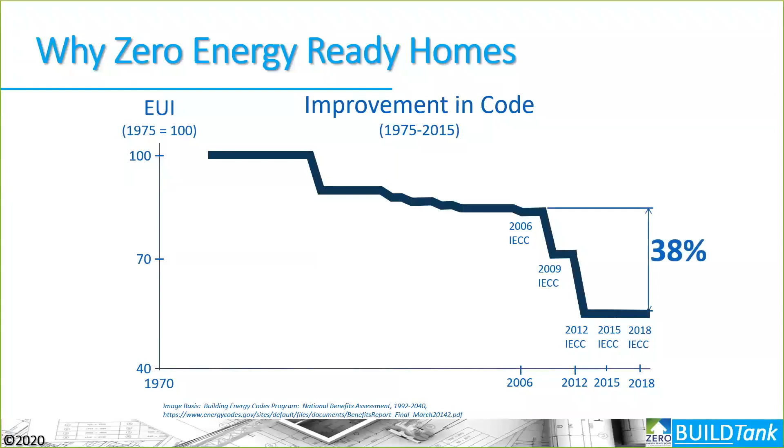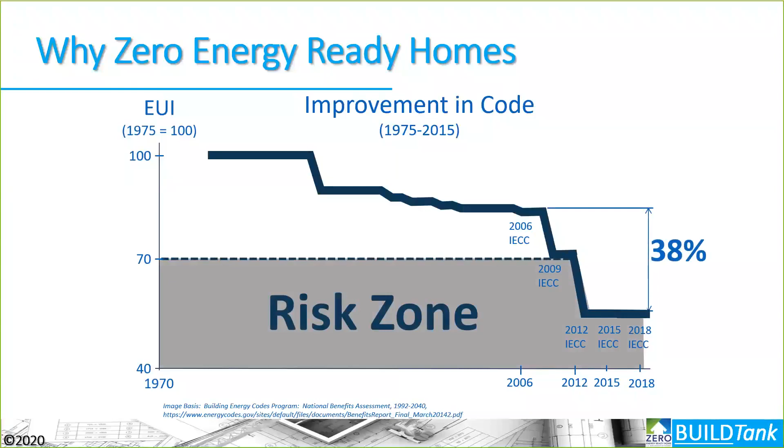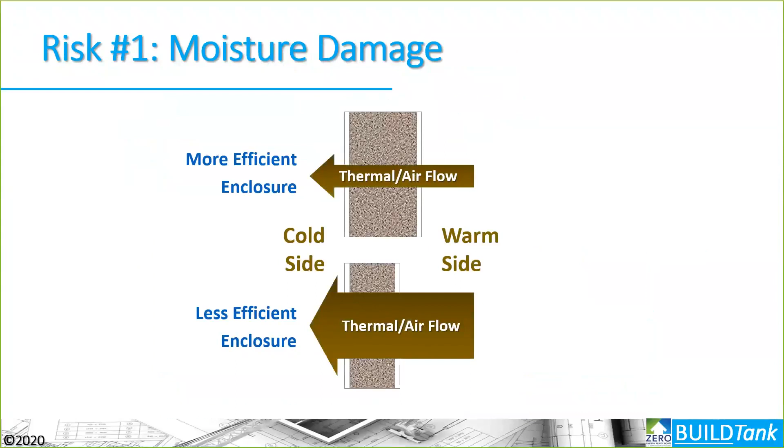What we do know is that this roughly 38% increase in efficiency gotten by codes has created potentially a risk zone that the Zero Energy Ready Home program is really trying to address. And what I mean by that risk zone is, if we look at one of these risks, potential moisture damage, we see that energy flow through a more efficient thermal envelope is less. And because it's less, we get this colder surface on the exterior of our buildings, and that colder surface is prone to more wetting or condensation and less drying potential.

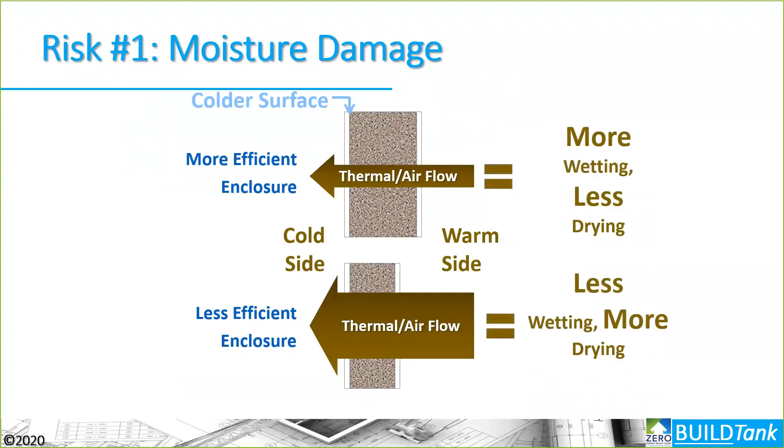And so there is this need to continually consider the applied building science and systems thinking that we talked about last time with regards to how we're building our homes now in order to mitigate this risk. And the DOE Zero Energy Ready Home Program is a means of applying that building science to mitigate this potential risk. Another risk that we have, although not as much in our drier climate, is a comfort issue risk.

This lessening of thermal flow through our building envelopes creates longer swing seasons, and especially in more humid climates, the humidity control that's needed in our houses becomes a bigger issue. So ensuring that we have properly designed and sized HVAC systems to deal with not only heating and cooling our house, but humidity control, is an issue. And ensuring that we have HVAC systems, whether they're hydronic or electric or forced air, that take into account this change in our thermal envelope is crucial.

And we're seeing that the majority of new houses really are designing that HVAC system before the house is built, and there's this disconnect between ensuring that what is specified for that thermal envelope is actually being executed, and that the design and performance of the HVAC system is actually meeting that thermal envelope.

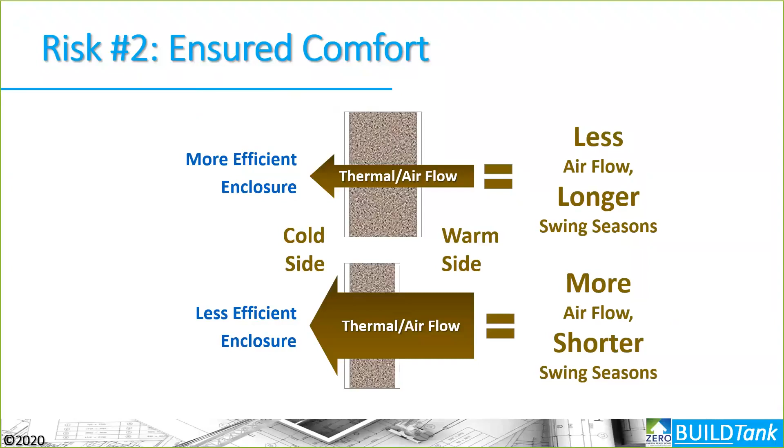So this is one of those potential risks. And then the third kind of risk that the Zero Energy Ready Home Program deals with is the tightening of our thermal envelope. As we tighten our thermal envelope and create better and more efficient homes, we also are potentially accumulating more contaminants inside that home unless we are dealing with ventilation in a meaningful way. And the Indoor airPLUS program that's tied to the Zero Energy Ready Home Program is really dealing with this potential risk there.

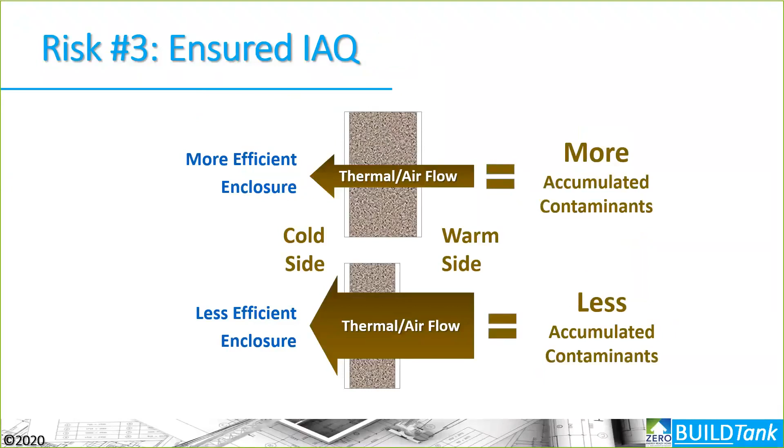So as we're building more energy efficient homes through just the IECC process, we need to think about these building science and systems thinking approaches in order to mitigate the potential risks that we're having. And again, the DOE Zero Energy Ready Home Program helps us think about that in those terms here.

So what does Zero Energy Ready Home mean? So in order to deal with these risks, we're trying to optimize efficiency and get more energy efficient enclosures, energy efficient components in there, and integrate systems thinking and applied building science into the equation when we're thinking about designing and building the houses that we want to live in and we want to bring to market here.

The next step is to ultimately do no harm there. So we have to have comprehensive water protection systems and water management systems to ensure that we're not getting repeated wetting of our assemblies, that we're marrying wetting potential and drying potential, and really ensuring that we have more drying potential than wetting potential there.

Ensure that we have comfortable systems in our houses, all types of HVAC, again, depending on if you choose hydronic or forced air or whatever type of system, making sure that the system is wedded to the enclosure that we're building and that they're working together there. And then ultimately, proper indoor air quality concerns to have not only a look at the materials that we're bringing into our homes and building with, but that we have proper ventilation in our houses as well.

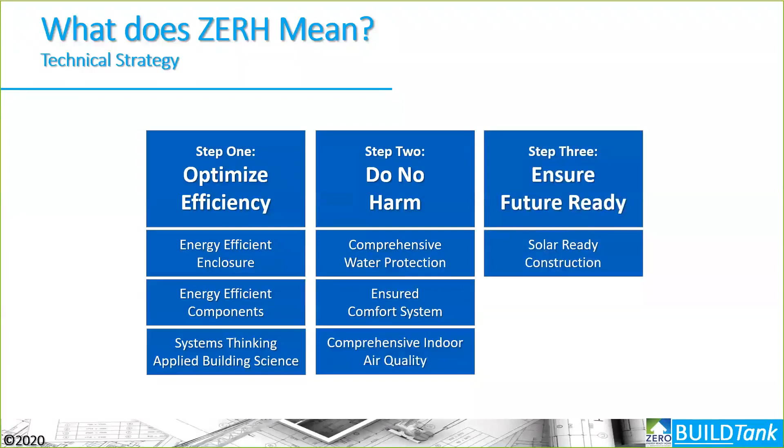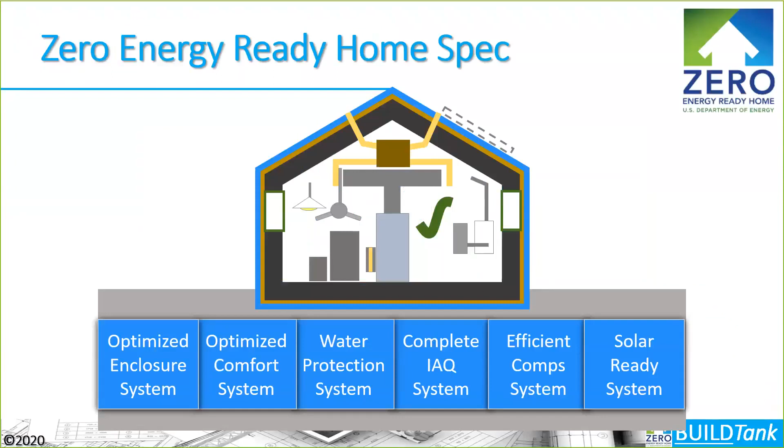So looking at this again, these different components or specs for the DOE Zero Energy Ready Home program is optimizing that enclosure, optimizing the comfort system, ensuring that we have proper water management systems in our homes, not only for bulk water, but for water in its vapor state as well, complete indoor air quality systems, efficient components, and then we're ultimately ready for that solar at the end here to take it that next step.

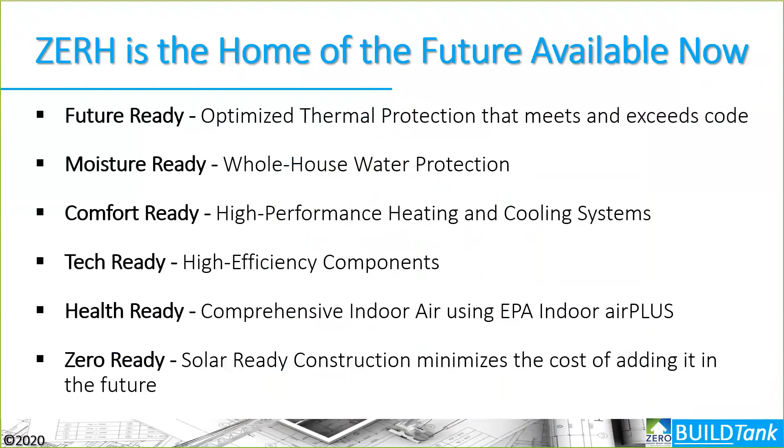So another way to think about it is being future ready, and that's really what we're talking about here. The Zero Energy Ready Home program has been named that specifically because it's not a zero energy program. It's getting you to that point. It's future proofing that house. So we're moisture ready, we're comfort ready, we have technology and health. We're ready to put on that PV panel that will take us that next step.

So hence the definition of the Zero Energy Ready Home program, which says that it's a high-performance home which is so energy efficient that a renewable energy system can offset all or most of its annual energy consumption. What it is not saying is that you have to offset that annual consumption at the time of construction. So in essence, again, we're future-proofing that house there.

So this definition means that we have a pathway. We've achieved a pathway to get to zero energy. We've maximized our thermal envelope. We've maximized the systems in our houses. And generally speaking, if you've done a good job of that, you can only get to about a HERS 40 in that HERS rating system, which we'll talk about a little bit more. The rest of that to get to true zero is happening by adding PV, or solar photovoltaic, to your house there.

So at a minimum, every home is future-proofed. And what we mean ultimately by future-proof is this example here. So we see that PV generation is increasing and improving over time here. So if I had a panel that could produce 200 watts now, in the future it could produce 500 watts there.

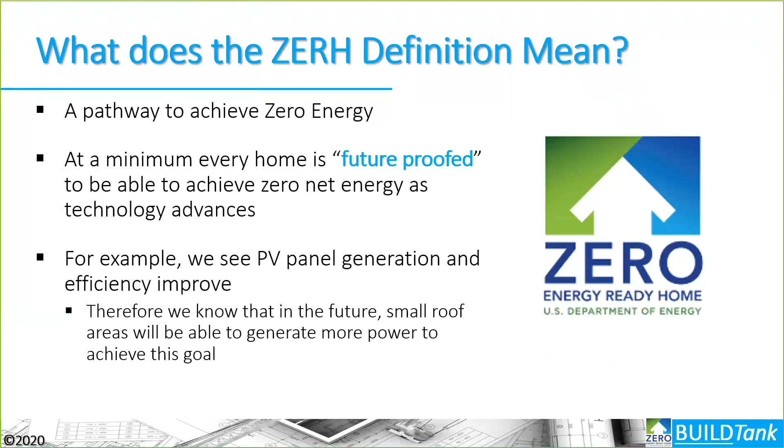So it's going to be easier to get to that zero energy if I've maximized my thermal envelope and I've taken into account the opportunity cost to do those things that are behind the drywall correctly and future-proof that house, so that when it makes sense to add solar in the future, I'm able to take that house to zero energy. Now, that doesn't mean that we can't do that from the start, that we can't design the house and make it make sense to add solar at the beginning. But what it does mean is that the program doesn't require that you put that solar on and get all the way to zero energy from the get-go here.

So what we've really been talking about is how do we define that thermal envelope and how do we maximize that thermal envelope's performance within reason to be able to make it make sense ultimately to put that PV on the house. And we have to remember that it's not just the thermal envelope that we're thinking about, but these other systems that we're putting into our house, specifically HVAC or air conditioning of the air in our houses to heat and cool our houses. What type of systems are we putting in there? What type of appliances are we putting in there?

Because these are things that last for significant amounts of time, especially the thermal envelope. You know, we think that that house should last 50 to 100 years. We're not going to want to go back in and upgrade that component of the house. If we're talking about HVAC systems, we're not going to want to go in and update the hydronic piping or the ductwork in that house. We want those things to be rock solid at the time of construction. We have that one-time opportunity cost to do those things right.

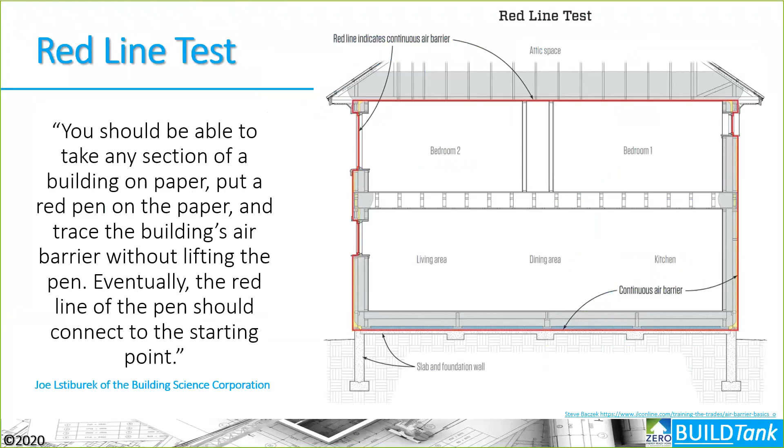But the boiler or the furnace or the PV system, those technologies will continue to advance, and we can change out those things and future-proof our houses to be able to change those things out easily and get to zero energy easily sometime in the future if we're not going to take it there from the get-go. So this difference between zero and zero energy ready is really this notion of maximizing our systems, taking advantage of that first-time opportunity cost to do the things behind the drywall correctly and in the best way possible and the most efficient way possible to set us up ready to get to zero energy in the future.

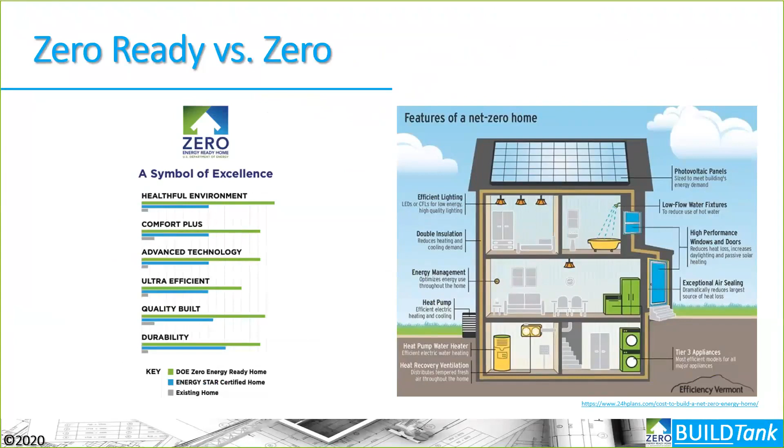And you see the zero energy house on the right. The biggest difference there is the addition of the PV. And just to stress it one last time, that PV can be added from the get-go, from the start of the project, but it's up to you. You can decide to go that direction or not. It's not a requirement of the program, and therefore it's not a requirement of what's happening up in Summit County there.

So what's the business case for doing that? Why are people thinking about zero energy? Well, there are climate goals for 2030 and beyond, but we also see that we get a significant amount of energy bill or energy savings from just a dollar perspective there. And we get a significant amount of carbon emissions reduction by going this direction. So that's definitely part of the equation of why people want to go this direction to build more efficient homes.

We also see that there's a consumer case as well, just a much better living experience inside our houses. We have better health and comfort. We have protection from the elements and from the cost of ownership. We have better quality and enhanced value in these houses. It has been shown over time that homes built to programs like Energy Star and the DOE Zero Energy Ready Home Program keep their value much more and have that long-term value and resale perspective, as well as from the first sale perspective, that there's advantages there.

There's lower cost of ownership, so your monthly cash flow is higher. You're spending less on your utility bills, therefore you have more money to either save or spend on other things there. There's lower maintenance costs, and there's usually lower health expenses as well. People live more healthfully, if that's a word, inside of these homes than in other homes that haven't taken this into consideration there.

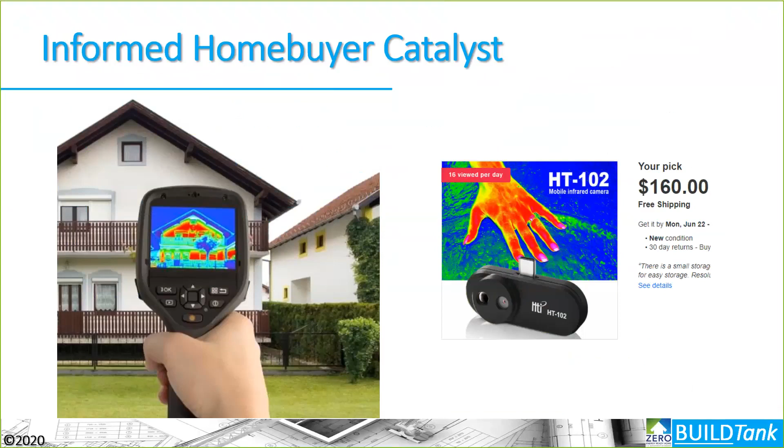Informed buyers also have a bunch of tools available to them that weren't really available to them in the past, this being one of them. These IR cameras are incredibly cheap, so cheap that they might end up in the hands of a home buyer. If not a home buyer, then somebody that might be consulting with the home buyer, somebody who wants to build their house. They can assess things like quality, insulation, and the thermal bridging components of houses.

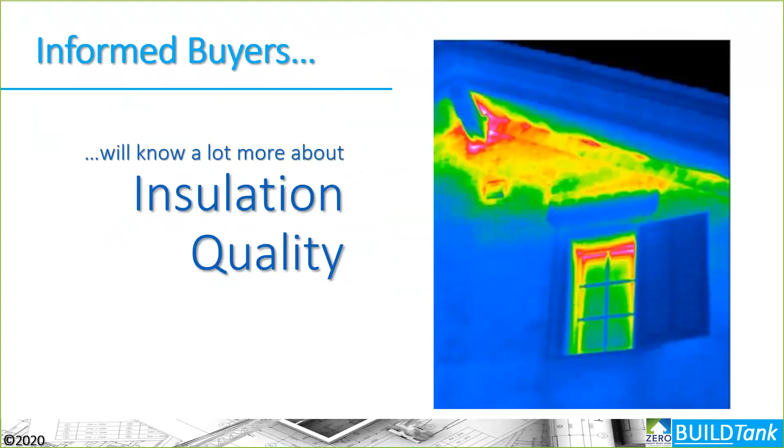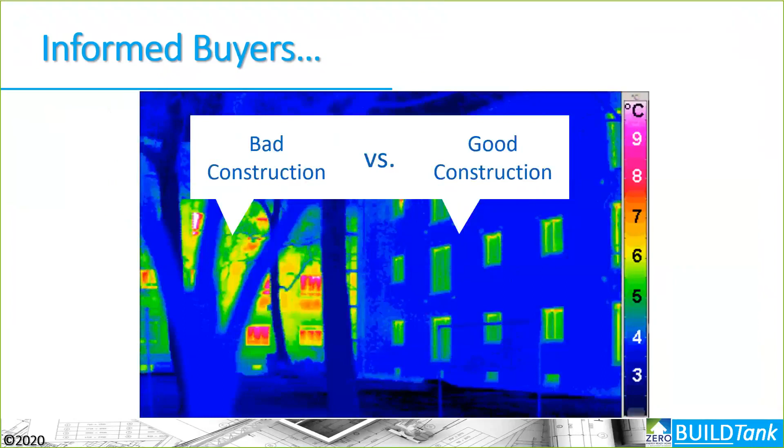So they might come to you and ask, how are you dealing with this picture that I took? They can look at and assess the quality of windows. They might not know what they're looking at here, but this is a moisture issue that's associated with a thermal image. But they can have a pretty good idea of good construction and bad construction very easily. And even though they might not buy these cameras, these images are all over the internet, and an informed buyer is going to see that and maybe come to you with questions and concerns about that.

Informed buyers are increasingly aware of the living experience inside of houses and questioning how I can meet my core expectations. And if my core expectations are comfort and durability and health and all these other aspects, how can I build a house that will ultimately live better? And so the Zero Energy Ready Home Program gives us a platform for being able to create these houses that are proven to live better. But we need to think about how we're going to ultimately design and build that house.

And so what we recommend and the program recommends is beginning with an integrated design process. Some folks call this a building charrette, but really it's just a planning process. So in this integrated design process, we need to recognize that we might be doing something different than we've done in the past, and that's a change, and that change can be hard, but change can also lead us in good directions and help us understand why we're ultimately changing the way that we're constructing our houses. To create better efficiency, to create better long-term durability, to lessen risk for us as builders, but also risk for our occupants that will be living in these houses.

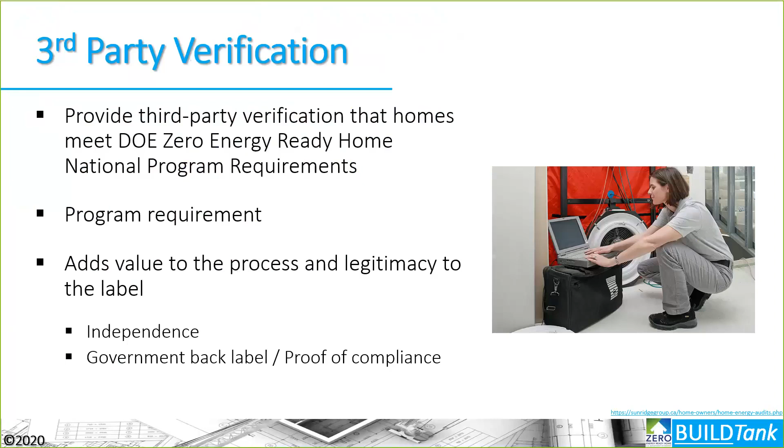So we're no longer saying, you know, I as a builder or as an architect, we do X, Y, Z. We're now able to actually prove that we're doing X, Y, Z, that we're building the most efficient, beautiful house that's going to be the most comfortable possible. I have some ability to say, I can prove that we're doing what we're saying we're doing because I have this label behind me as well. So it's definitely something to think about.

This verification by approved agency is something that the IECC has had in the code for quite some time. So an approved party is often a HERS rater, and the jurisdictions generally approve HERS raters or others to be an approved party to do code compliance. The DOE program also approves raters and others to be partners with the program to do third-party verification of the program as well. So you can go onto their site and find an approved rater, and I'll show you that in a second here. But with these third-party services, we think of potentially consulting and participation in that integrated design process as one of the things that they can do, because they have a lot of knowledge to share.

They have great knowledge about the program requirements for the DOE program, great knowledge about applied building science, and good knowledge about assemblies and material selection. Ultimately, how does this verification process impact the construction schedule, and how can they limit that impact so you can get on with the true construction of the house? Including that third party in design charrettes, design integration processes, and planning meetings becomes a crucial thing to think about.

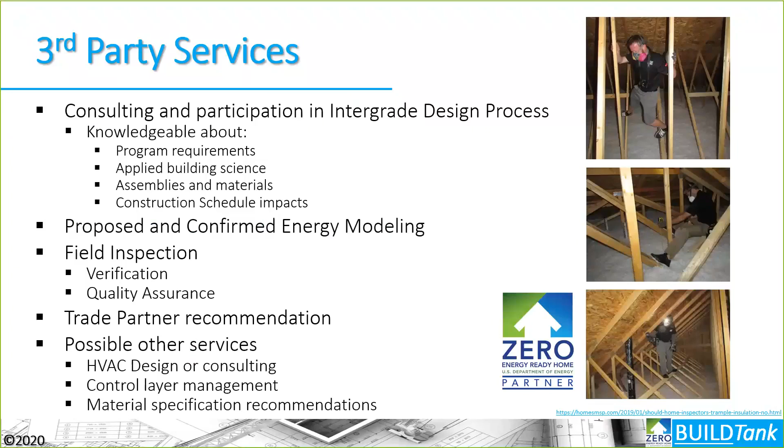So there are lots of reasons to think about third-party services beyond just the true verification of the DOE program requirements. The other thing about working with a third party that is ResNet certified, or a ResNet rater, is that ResNet does a significant amount of quality assurance on the rater.

Rating providers are the institution within ResNet, the Residential Energy Services Network, that actually certifies the rater. The rating provider has to employ what's called a quality assurance designee to perform quality assurance on certified raters. This is the minimum amount of quality assurance happening: 10% of the building software files, the energy modeling, is reviewed, and at least 1% of the rater's homes' field work is reviewed as well.

ResNet ultimately performs QA on the providers, which adds another level of quality assurance to the process.

The tracking of this quality assurance happens real time through what's called the ResNet registry. Every house that has a home energy rating done on it is registered in a national registry of homes, and you can go on that system to determine how the raters are doing - I'll show you that here in a second. This is the website, actually.

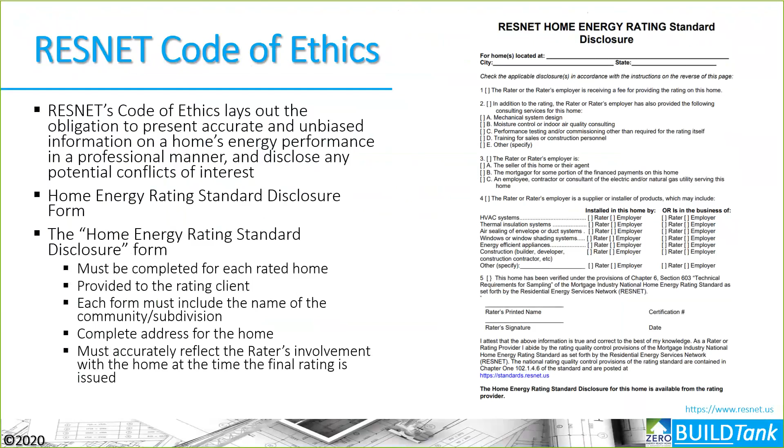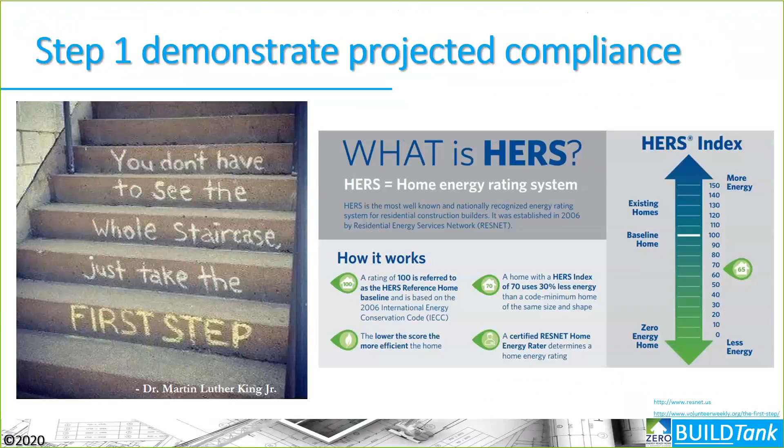Moving more to the specifics of the program, the first step is demonstrating projected compliance, and that first step begins with what we call a HERS rating. So what is a HERS index? ResNet, the Residential Energy Services Network, is the governing body of the home energy rating industry. They set the standards of practice and the standards for how things are modeled to develop that home energy rating index score. So there's the HERS, or Home Energy Rating System Index score, and there's an ERI, or Energy Rating Index. The HERS index isn't necessarily the same thing as an ERI.

A HERS index is an example of an energy rating index, but there are other energy rating indexes out there, most predominantly the Energy Rating Index for the 2015 and 2018 IECC. They aren't necessarily the same number, but it's basically using the same process for generating that index number.

Like a golf score, an energy rating index means that the lower the number, the more efficient that house is. So the lower, the better, zero being that zero energy home. You can think of it as a miles per gallon rating system for homes, as a way to document the efficiency of a house in a number system.

In the HERS scale for ResNet, the reference home is based off of 100 on the scale, which is equivalent to a home built to the 2006 IECC. If we remember back to the beginning of the presentation, everything is basically benchmarked off of the 2006 IECC. That's how I can tell you that the 2009 is about 15% better than the 2006, and the 2012 is about 30% better than the 2006 IECC. Everything is kind of benchmarked off that 2006 IECC.

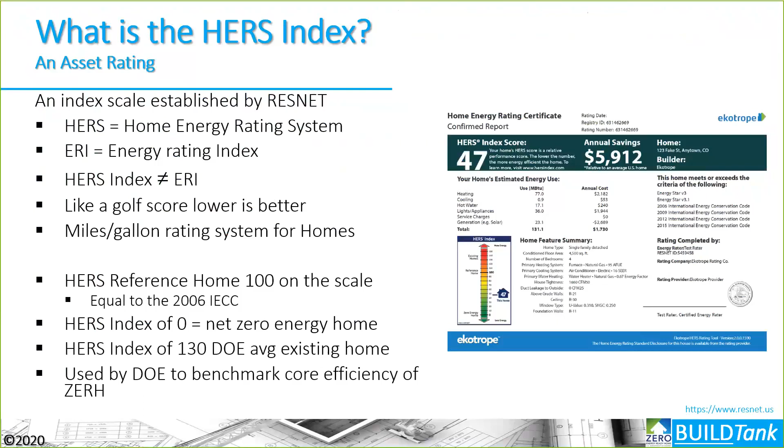A HERS index of 0 is that net zero energy home, a home that produces as much energy as it uses. The DOE has determined that on average, the average existing home out there is scoring about 130 on the scale. It's used by the DOE to benchmark the core efficiency of the DOE Zero Energy Ready Home program. It turns out Energy Star also uses this system to benchmark the efficiency for the Energy Star program.

So what we mean by putting an X through this certificate is that this certificate is an informational certificate. It's designed to be that miles per gallon rating for the occupant or buyer of that house. It gives lots of great information, but it is not a compliance certificate. It doesn't demonstrate that the house met the intent of code or the requirements of a program like the Zero Energy Ready Home program. So you're going to get the certificate, and it's great to put in front of buyers of homes, but you need to know what it is and what it isn't. It's a marketing mechanism certificate, not a compliance mechanism certificate.

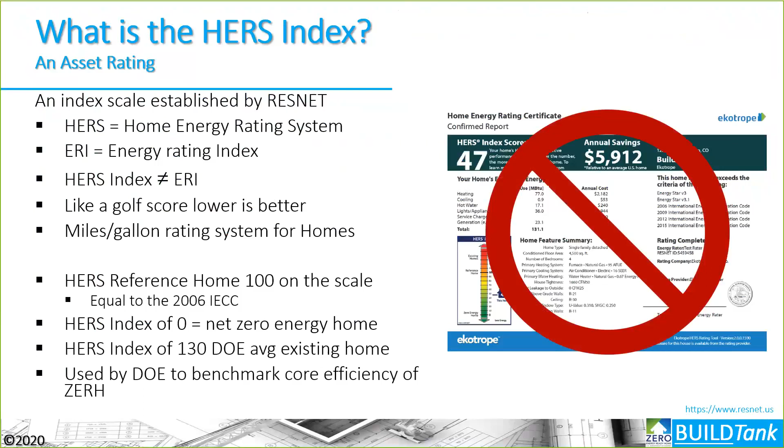When we're talking about showing compliance with the home for the DOE Zero Energy program, you can choose to go a prescriptive path or a performance path. The prescriptive path is like the prescriptive path in the code, and the performance path is like the performance path in the code. Prescriptively, it's basically a rigid set of requirements that you must do—you can't go below those things, but you can exceed them. In the performance path, you have greater flexibility because you're able to trade things off.

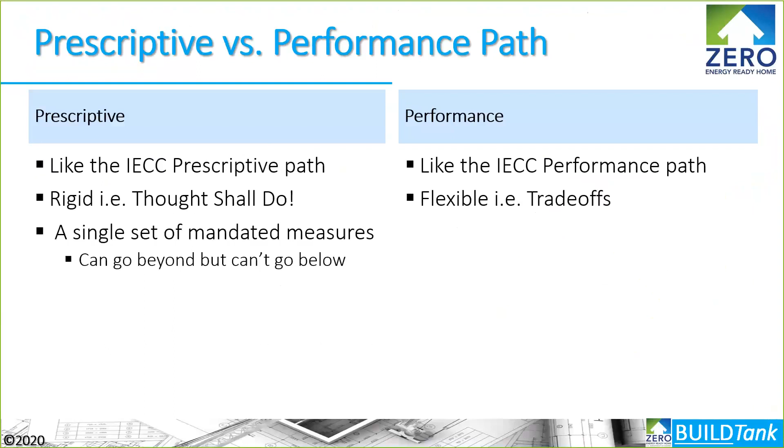You're able to have more choice in the specifications you're putting into that home. On the prescriptive side, it's a single set of mandated measures. Again, you can go beyond, but you can't go below. On the performance side, we basically start with what the builder wants to do, and we see what the builder's current specification is, whether it's going to achieve the goal of Zero Energy Ready homes or if it needs to be tweaked a little bit. So you'll see that the stretch to zero energy probably isn't quite as large as you think, and most folks lean towards the performance approach because it's much more flexible than the prescriptive approach for compliance.

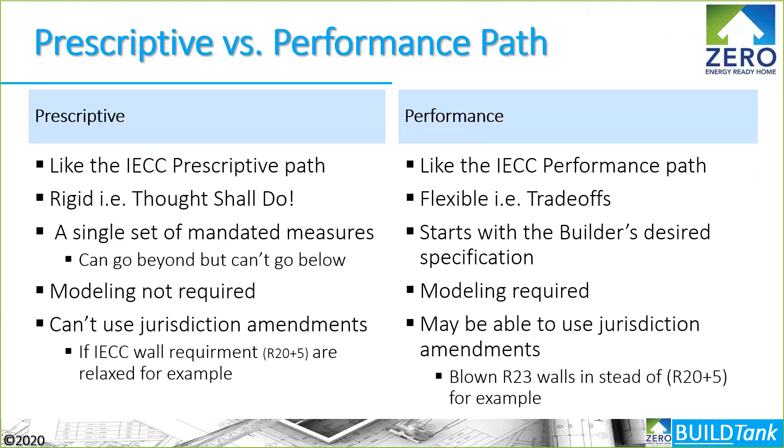Now, modeling is not necessarily required. It is not required if you use the prescriptive path. The performance path does require that model, and we'll show that here in a second. In the prescriptive path, if there are jurisdictional amendments used or created in that jurisdiction, you can't use those. Whereas in the performance path, you might be able to use those jurisdictional amendments, and we'll show you how that demonstrates itself here in a second.

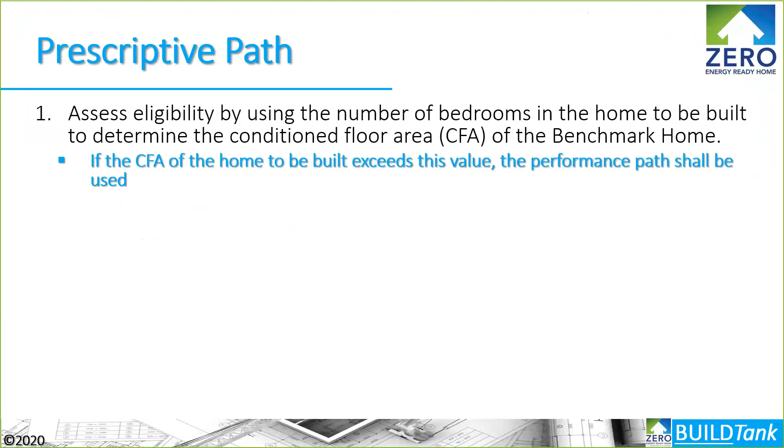So again, the prescriptive path ultimately assesses eligibility for that house by using the number of bedrooms in the home to be built to determine the conditioned floor area of that house and how it relates to what's called the benchmark home. So if the conditioned floor area of the home we're proposing to build exceeds this value, then you have to move to the performance path. I'll show you the benchmark home here in a second.

If the prescriptive path is eligible for use based on that prior step, then you have to use the mandatory requirements detailed out in the DOE Zero Energy Ready Home Target Home process. Again, these specifications are rigorous and you have to meet them. You can exceed them, but you can't go below them. You lose the flexibility of potentially trading off lesser attic insulation than required in the prescriptive path for more R value in your wall system or your windows or something like that.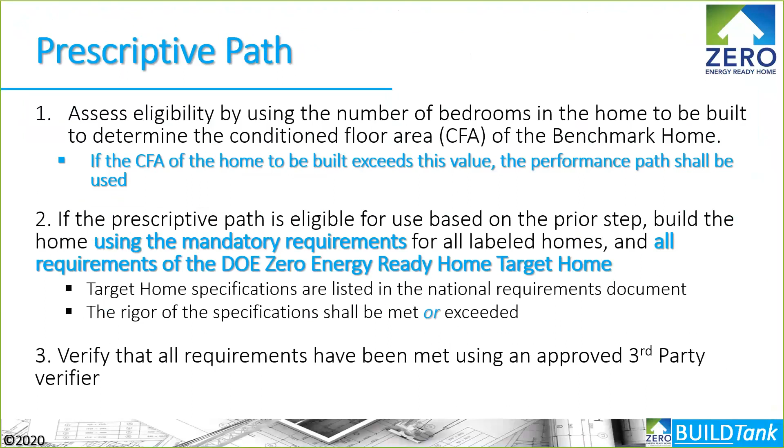Regardless, if you're using the prescriptive path, you still need third-party verification in the process. So another reason why most folks lean towards the performance path is that you still have to use a third-party verifier, and you gain more flexibility in the performance path.

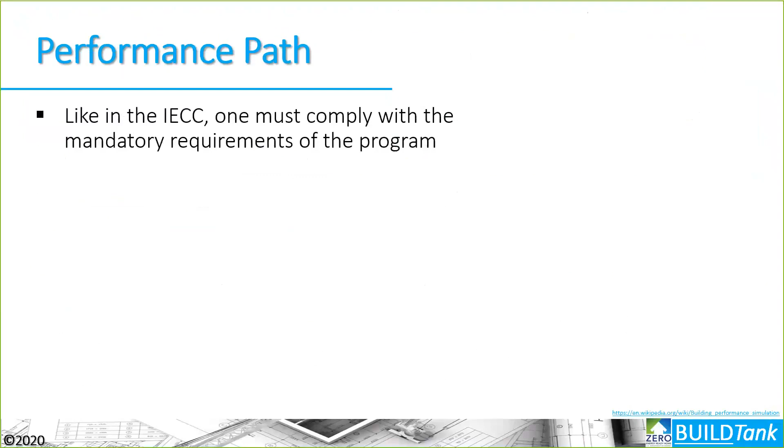So let's talk more about the performance path. Like the IECC, one must comply with all the mandatory requirements of the program, and then you can get that flexibility after you've done that. So the flexibility comes in when you're selecting a custom combination of specifications to meet or exceed those performance levels required by the DOE program.

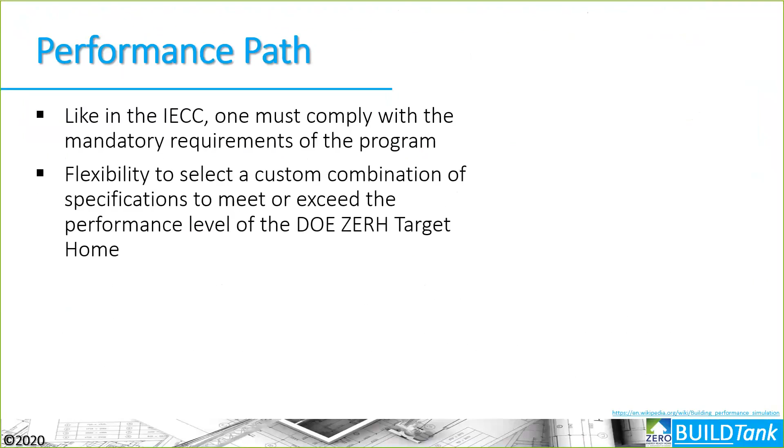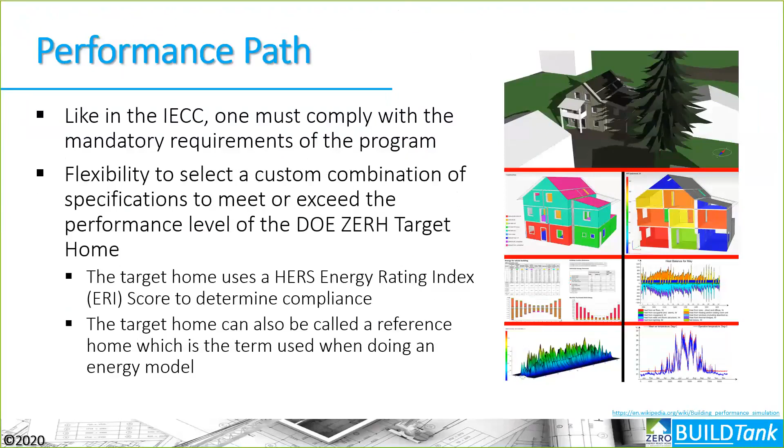So the target home uses a HERS index score to demonstrate this compliance, and the target home can also be called a reference home, which is the term used in the energy modeling world to determine what we're going to compare our proposed building structure to. We have to compare that structure to something in order to create an index compliance pathway. So ultimately, to understand the software, we want to understand how it works to create that HERS index score we'll use as our compliance mechanism in this first step.

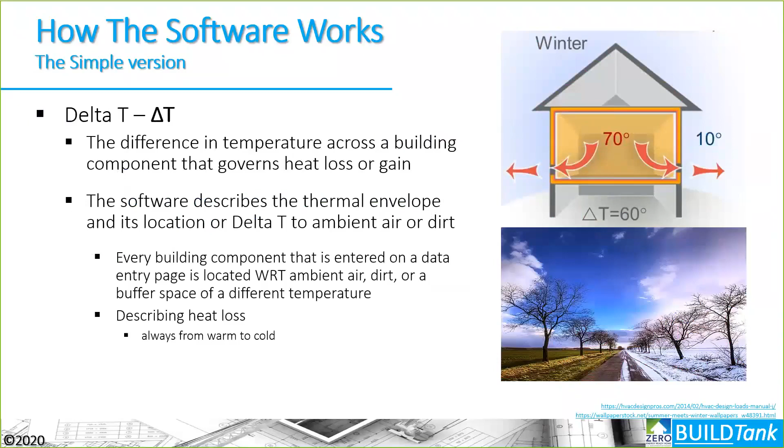Softwares basically work on this notion of delta T, or the temperature difference across a building component or assembly. This temperature difference governs heat gain and heat loss across the assembly, because energy is always moving from higher concentrations to lower concentrations. Within the software, we describe the thermal envelope in its entirety, from its foundation all the way up to its attic or roof plane adjacent to ambient air or ambient dirt. We're taking all these building components and putting them in relationship to a delta T location, to the ambient outside. So we're describing the thermal envelope, and that thermal envelope is our barrier or separation between conditioned space and unconditioned space. We're trying, ultimately in the energy model, to measure the amount of energy flowing through those assemblies from higher concentrations of energy to lower concentrations, which describes the heat loss in our buildings.

So when we're doing that, we create a reference home, and the software creates this reference home, which is the home that the rated house is compared to in order to quantify the performance and demonstrate compliance in our houses. A reference home is defined as a standard set of house specifications that generate a specific, consistent, and quantifiable energy performance in our homes.

So the DOE or the code or any other program that's using a reference home has defined the amount of energy use that they want to achieve in that house, and your house that you're proposing to build is compared to that in order to demonstrate if it's going to be able to do that or not, ultimately.

Which means that there are ultimately different types of reference homes out there. There's the IECC reference home. There's a HERS reference home that just benchmarks the efficiency of a house on that HERS index scale. But the DOE and Energy Star programs have their own reference homes, and I'll show you how that works here in a second. And then some utility programs that are offering utility builder incentives or other types of rebates might have their own user-defined reference home as well.

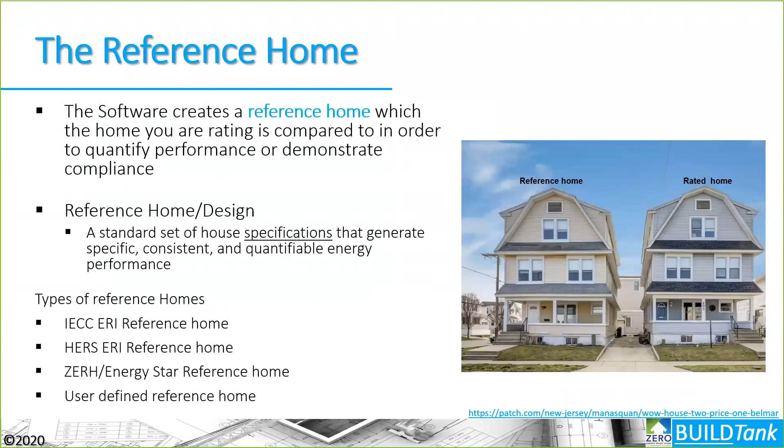So what's ultimately happening inside of the software is that we build a house inside of the software, and the software creates two homes that are geometric twins of each other. The reference home is overlaid with the IECC prescriptive envelope U values and R values, and any type of size adjustment that might happen because of a program like the DOE Zero Energy Ready Home program. The builder's house that you're going to compare to the reference home uses whatever the builder decides to use for its envelope R values and U values, and then also puts the size adjustment on there.

So ultimately, the builder's house is compared to the reference home to create a HERS target index score. And the house that is built must be equal to or less than the modeled HERS index score in this first step here. It's a lot of language that we've gone through to get to this point, but the ultimate point here is that we're creating a HERS target score that's ultimately demonstrating compliance in this first step. Everything else becomes the mandatory requirements of the home. This becomes the benchmark of the energy performance of that home. And again, your house has to be less than or equal to the HERS index that is developed through this modeling process, plus potentially any size adjustment that happens.

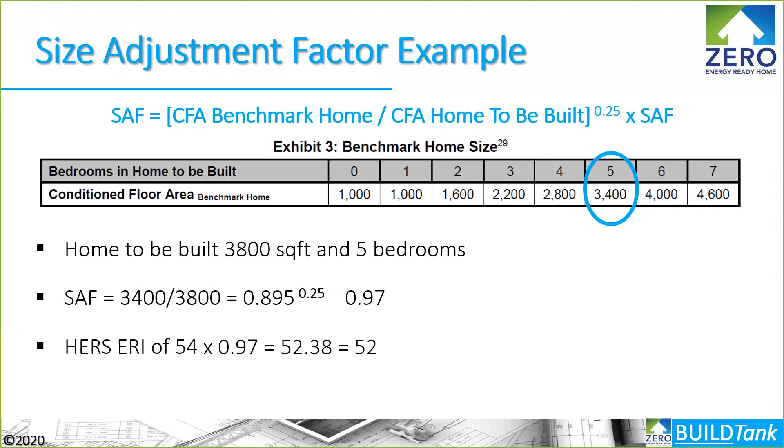And so again, this is one reason why you'll see that it's not a mandate of the program that you install solar on the house. The program is trying to ensure that we have a rock-solid thermal envelope to build on, to future-proof our house so that we can put solar on in the future to get to true zero. So the program documents basically say that on-site power generation may not be used to qualify a home for the DOE Zero Energy Ready Home program requirements. However, it can be used to achieve additional HERS index reductions needed for these larger homes to meet the benchmark home.

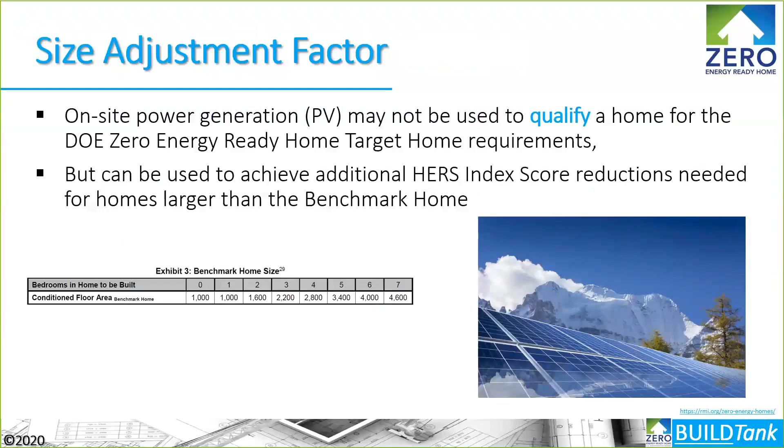It's not, in essence, making it less impactful to add that solar to it, but it's just trying to ensure that solar isn't impacting the need for a rock-solid building thermal envelope in our houses here. What we do see in this modeling process, which is a little bit contradictory right now, is that electric homes are currently, in essence, penalized in the HERS rating system. So this drives the Zero Energy Ready Home target score down if you're using electric equipment in those houses.

And why it's a bit contradictory is that often when we're talking about wanting to add PV to our structures in order to offset, PV obviously is generating electricity. So in order to offset the energy use in the house, we might want to ensure that we have electric appliances in our homes, for example, to use PV to offset that rather than gas appliances. Right now, it's something that the DOE is struggling with. RESNET and the energy modeling world are struggling with it as well, and hopefully we'll get some resolution to this dichotomy in the future.

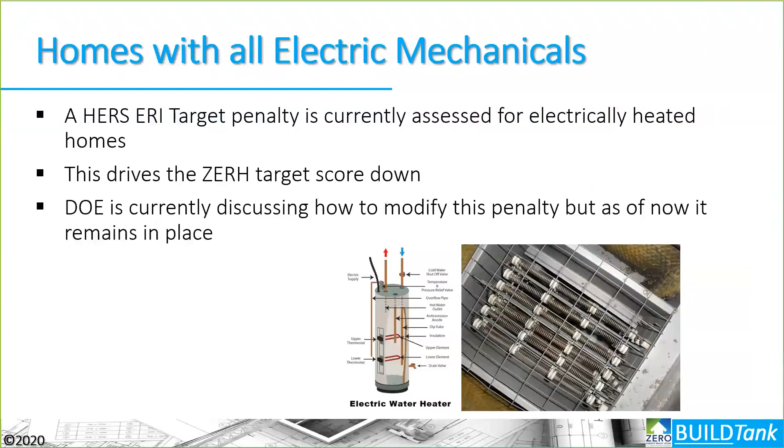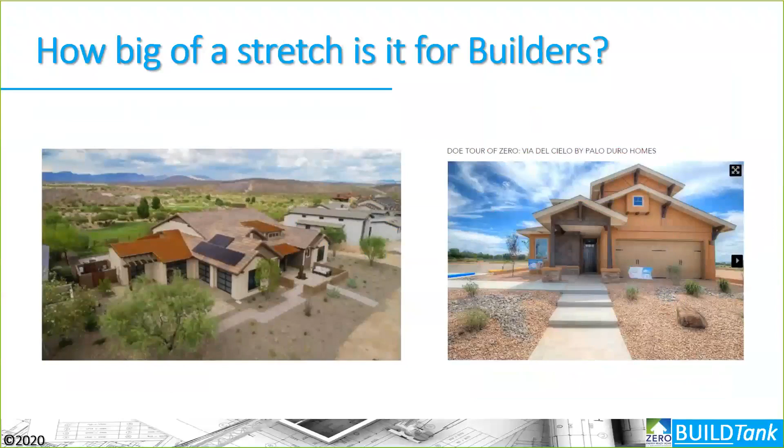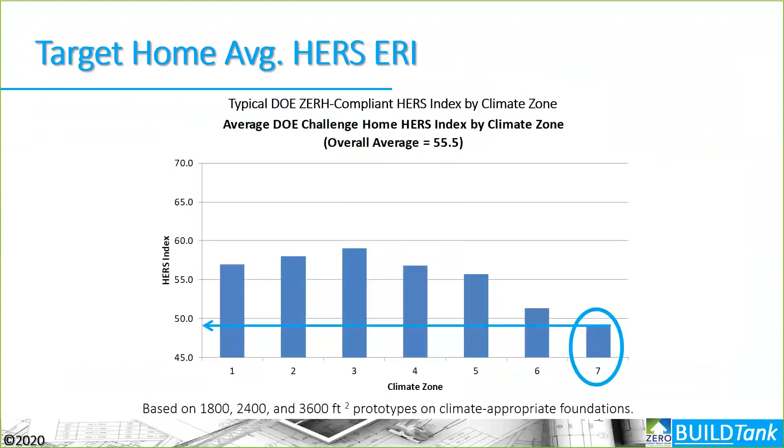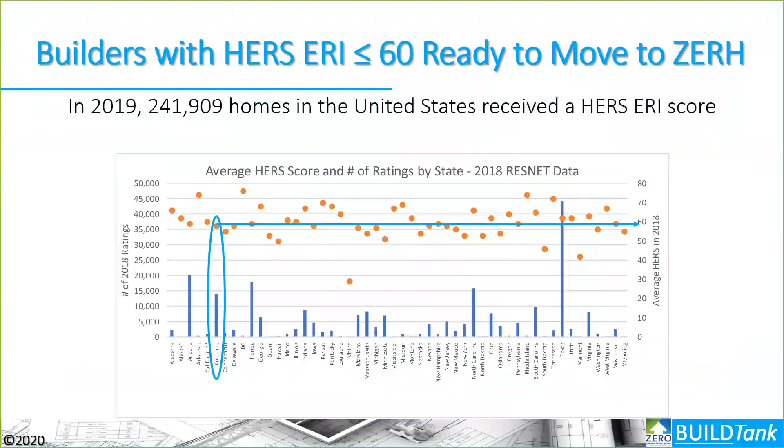So ultimately, the question might be how big of a stretch is this for builders in our climate zone? When we're looking at the average target home in climate zone 7, it turns out that the average compliant benchmark DOE zero energy HERS index score is about 49. Now, through some national data broken down into statewide data, we're seeing that the average HERS index score in Colorado is about 57. That takes into account a large number of homes that are built on the Front Range.

So my guess is that the homes up in Summit County are already below 57, and that the stretch to get to 49 probably isn't going to be as great as it is on the Front Range to get from 57 to 49. Interestingly enough, in Climate Zone 5 on the Front Range, the average benchmark score for the DOE Zero Energy Ready Home Program is about 55. So climate zones and increased elevation do make a difference.

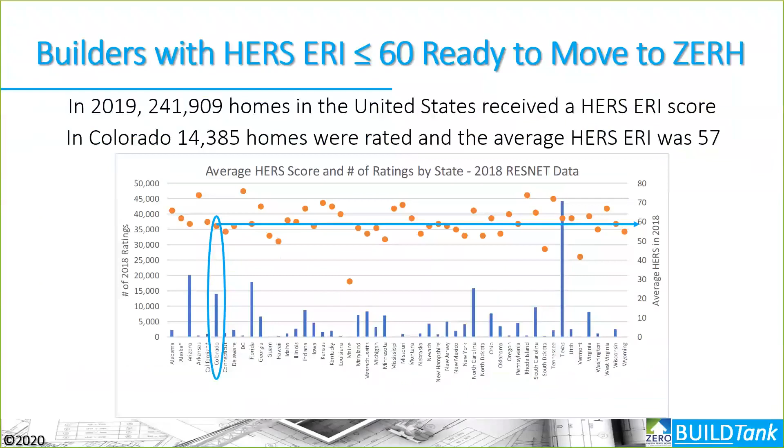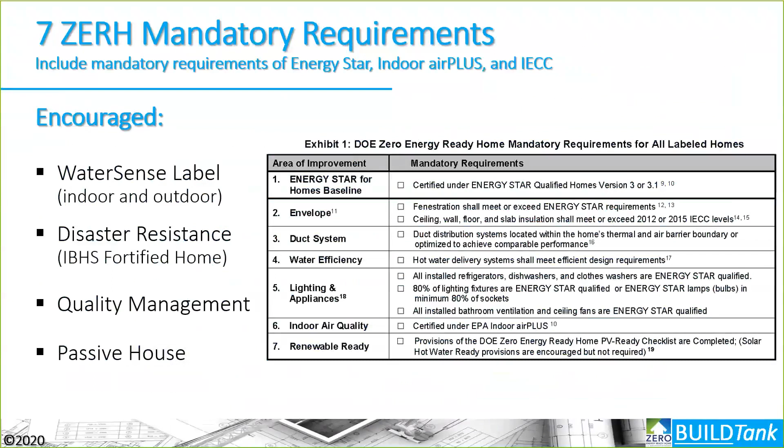Mandatory requirements. So there are 7 basic mandatory requirements of the program. And then there are some other things that are encouraged but not necessarily required. We'll go through each of these mandatory requirements individually. So the first is utilizing Energy Star as the foundation. Energy Star's foundation ensures that we get that rock solid envelope and a HERS index benchmark score that demonstrates that rock solid building thermal envelope.

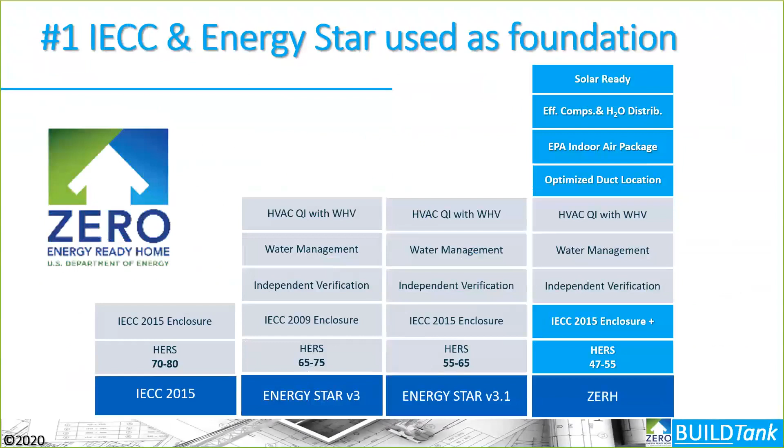The DOE adds some additional things to the envelope to ensure that we're going to be solar ready, that we have efficient water heating and distribution, that we have good indoor air quality, and that we've optimized our HVAC or heating and cooling systems in our houses as well. But again, it's basically using Energy Star as the foundation of our program to get that rock solid thermal envelope. And we'll be talking about those mandatory requirements next week.

So we have the 2015 IECC, which is kind of the foundation of the Energy Star program. We get tighter construction, we get better quality and performing windows, and we ultimately get compliance with the DOE program.

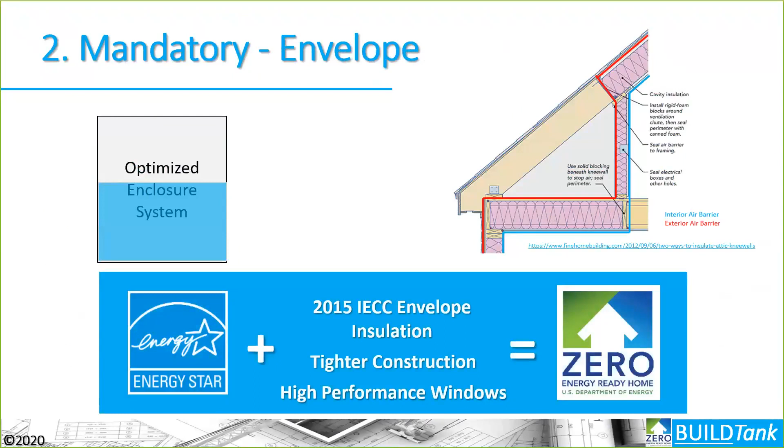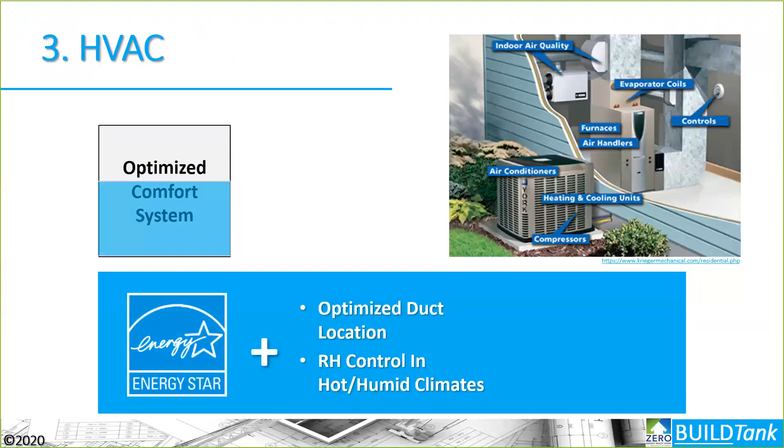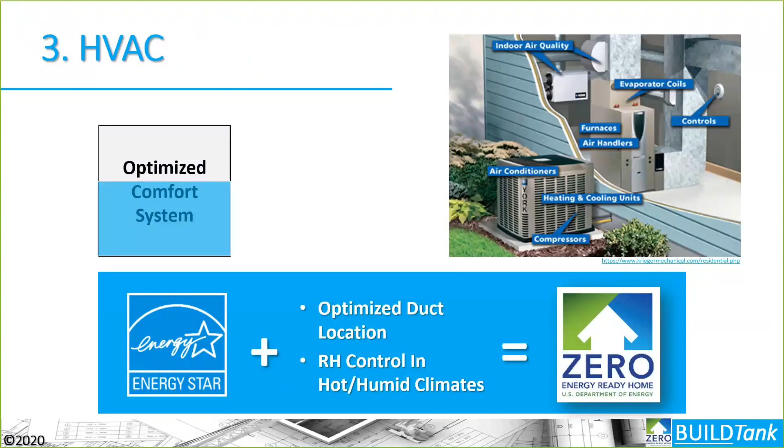HVAC: again, the program, being a national program, is skewed heavily towards forced air systems, and forced air systems obviously have duct systems. But from a hydronic perspective, which we see more often in Summit County, we want to make sure that we have good HVAC design and specifications, that we're using high efficiency equipment, and that we're ensuring the installation of that hydronic system is working well, and potentially thinking about air source heat pumps as well in those climates.

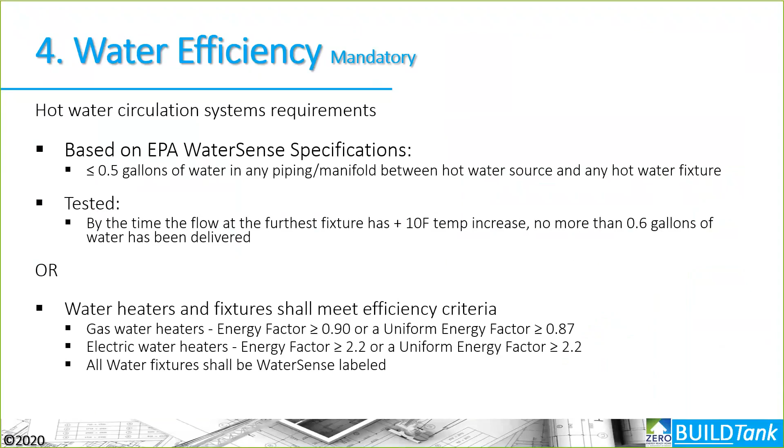Water efficiency is another big part of the program. This is the 4th mandatory requirement. It's talking about using some type of hot water circulation system and testing that it's actually performing. Or you can use more efficient hot water heaters and fixtures to meet the requirements. So if you're using a gas water heater, it has to be greater than or equal to 90% energy factor. Or if you're using an electric one, a 2.2 energy factor. You also have to have WaterSense labeled fixtures for your faucets and shower heads.

There, and your hot water distribution system can't store more than 1.2 gallons. So you do have to think about that distribution in either method that you're using to comply with the Zero Energy Ready Home program. And we'll talk about that more in the future here as well.

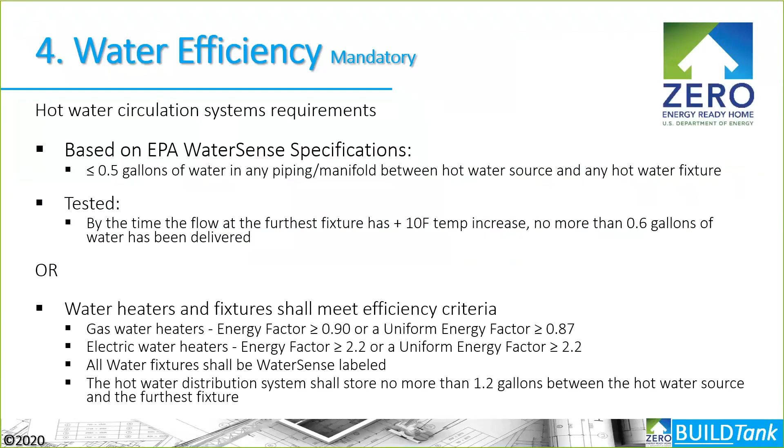Lights and appliances, again, ensuring that all the appliances, exhaust fans, lighting equipment, water heating equipment, all are Energy Star qualified, working in that system in order to get that DOE Zero Energy label there.

Indoor air quality relies heavily on the Indoor Air Plus program to ensure that our houses are not only radon resistant, but that we're using low emission materials, so the low VOC or off-gassing materials. We've dealt with combustion safety issues and filtration issues in our houses in order to get that DOE Zero Energy Ready Home label here.

And then ultimately that we're renewable ready. We're ready to put PV on the house if we haven't already done so. Therefore, we have to provide the PV ready checklist and meet the requirements of that in order to meet the DOE Zero Energy Ready Home program here. So there are these 7 core requirements. We're going to go into those in a lot more depth in our future presentations in this series here.

From a Summit County perspective, residential buildings under this section shall be designed to comply with the DOE Zero Energy Ready Home program. We're just about getting to the training implementation period, which is basically saying from July 1st through the end of the year that everything that's getting permitted should be permitted under the DOE Zero Energy Ready Home program, but we have some leeway in these first homes that are being implemented here.

So it's really beneficial to permit under this program so that you can start practicing and understanding what it's going to take to meet the intent of the code when it becomes the need to offer full compliance after January 1st, 2021 here.

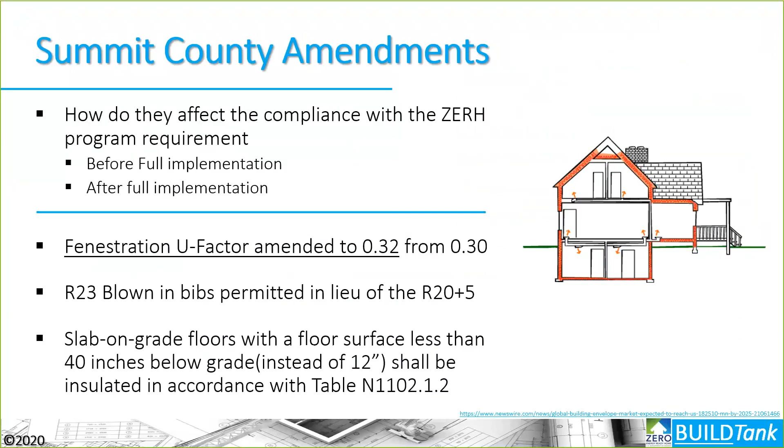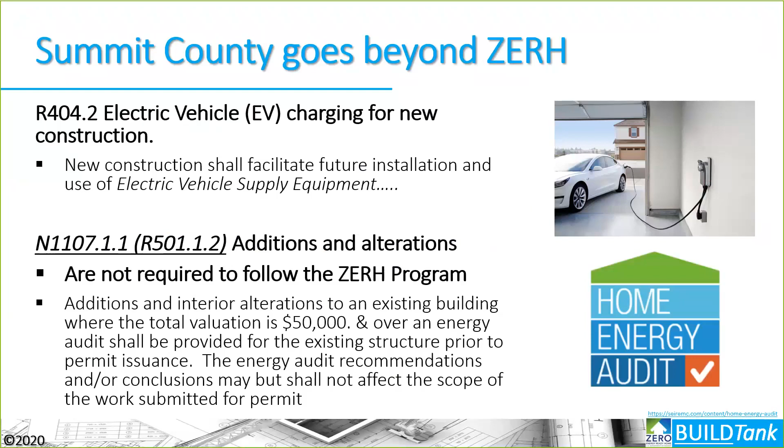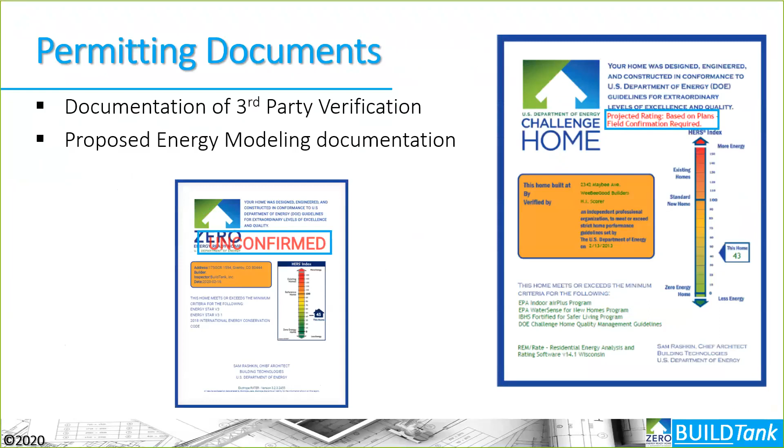The one on the left here is a document from the Ekotrope software, and it's showing that it's unconfirmed, which means that it's a proposed document there, and you could turn that into the city or jurisdiction as well to demonstrate compliance for permitting purposes.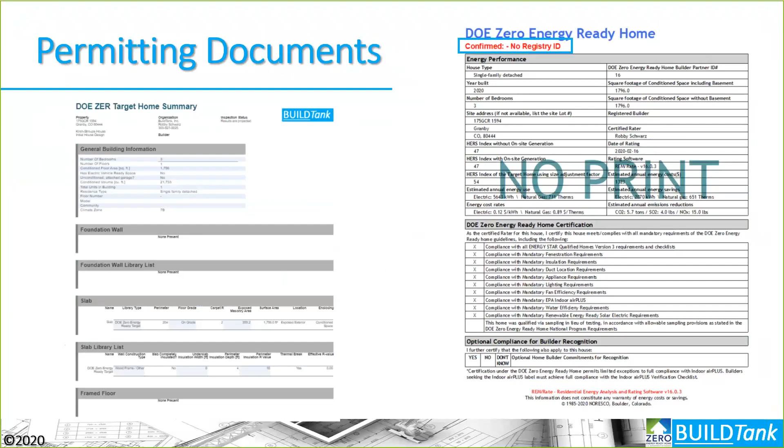Now, the second documents that are printed with these certificates are these two documents. Again, they look a little bit different depending on the software that you're going to use. The one on the right is from REM/Rate. Again, it says it doesn't have a registry number, so it's not confirmed yet. It is a proposed document.

One of the things I like about this document is this section here, which I've blown up a little bit. It gives you the target score. It also gives you the target score before on-site power generation, or PV, and after that is on there as well. So it's a good document that helps you do that.

Then the Ekotrope document demonstrates all the different components of the house in the same way that the REM/Rate document does. Breaks them out individually there, but it doesn't seem to give you the HERS target score as clearly as the REM/Rate one does. But it does tell you that it is a projected project. I just blew up that information there. And so it's a good document to turn in, depending on which software package your third-party verifier is using.

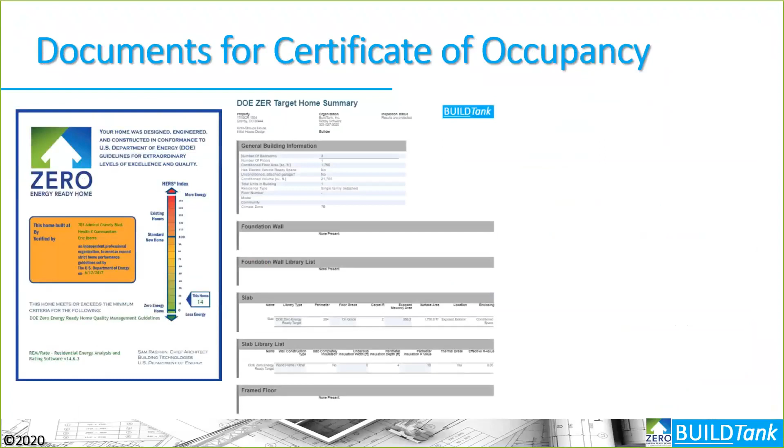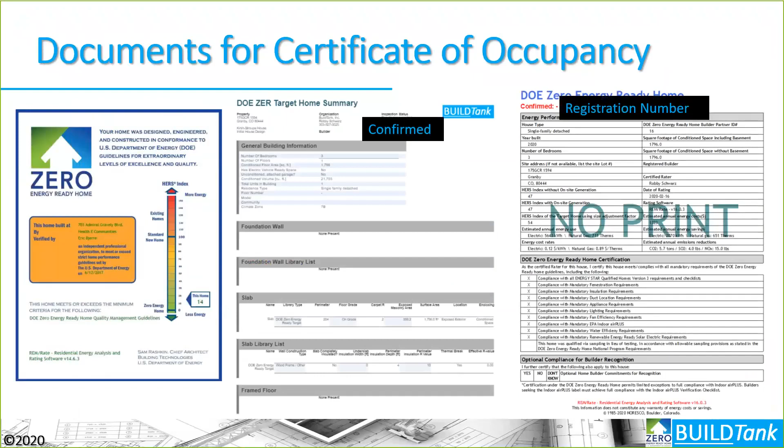Now, for the certificate of occupancy, you need to turn this document in, the certificate again, ensuring that it's a confirmed document, not a proposed document. And then the supplemental documents as well need to be turned in, ensuring that it's a confirmed document and that they have the registration number for the HERS RESNET registry on these documents as well. That way you can prove that these homes have been verified and that they've been submitted to the program to be able to get the DOE label on that house and therefore are code compliant as well.

So let's change course here a little bit and talk about how to communicate Zero. It makes a lot of sense to consider how you're going to communicate this program to your clients, to the buyers in Summit County, even though it is a code compliant program now. Because not everybody is going to market it, you will get an advantage.

And we see constantly, there's a community like Stapleton in Denver here, that's a mandatory Energy Star community, and only one of the builders in the community consistently markets themselves as an Energy Star builder, and they've been able to grow a market there. So again, if you're not talking about it, you're ultimately giving it away, and you don't want to necessarily give it away because there's tons of value in demonstrating that you're doing this Zero Energy Ready Home program.

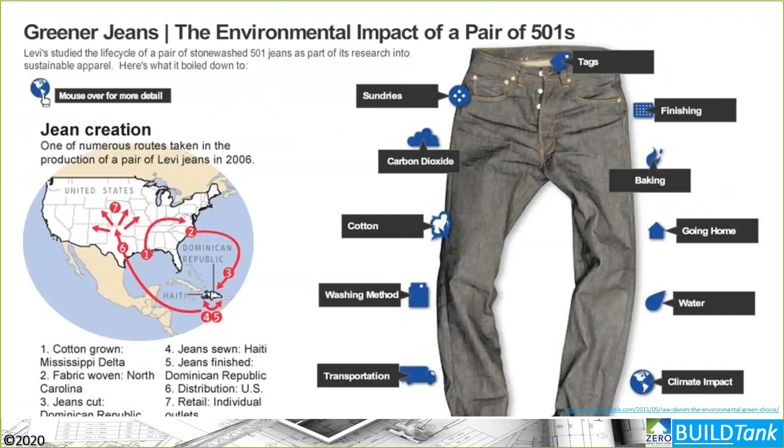So to begin with, it's interesting to me. I came across this years ago, and this is kind of a new generation of this that Levi's has gone through, to demonstrate the story that can be told by a simple pair of jeans. We can talk about carbon emission, sustainable fabrics, water use, climate impact, all these different things. So if I can tell a story about a pair of jeans, I should be able to have a compelling story to tell about my house.

One way to do that is to think about this NASCAR approach and putting all these labels on the house. Or you can simplify it and just go with the DOE Zero Energy Ready Home label and really talk about that label and how it utilizes Energy Star and Indoor airPLUS, or at least answers the questions that Energy Star, Indoor airPLUS, codes, and the Building America program bring to the equation. But a lot of people like the NASCAR approach and basically using all of these labels when talking about the home.

Another thing that Daniel Pink brings out is that we often understand things better if we can demonstrate a comparison and a contrast. And if we can isolate those compare and contrast statements, we can often tell a good story. So the DOE program has kind of leveraged that with these types of documents here. You can see that they can be customized to your particular structure, your particular project.

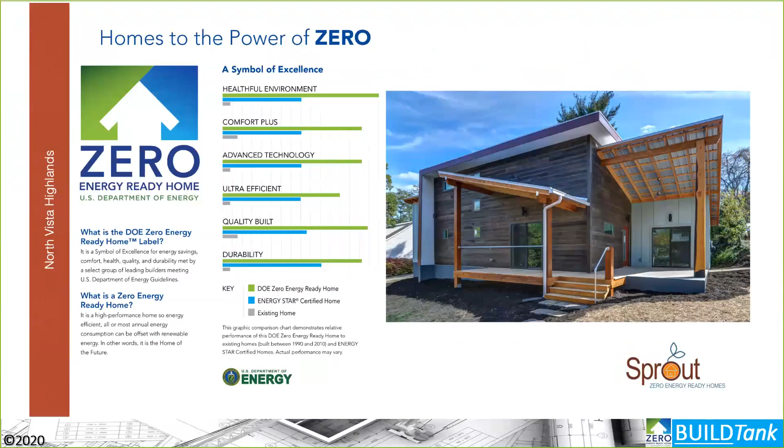You might think about how to create a message from a pre-sale perspective. You can leverage the DOE site there and ask people to go to that site. They can click on Colorado and they can get to you as a partner of the program and find out more information about you as a partner to the DOE Zero Energy Ready Home program. They can determine how many houses you've built, what type of projects you've taken on. There are lots of interesting things they can do there.

They can also view videos that the program has created to help simplify the message and really put forward that core message of what the DOE Zero Energy Ready Home program is trying to do there. These compare and contrast documents have been put into flyers that you can use as a partner of the program. You're able to use any of the flyers that are out there, and you're able to customize those flyers to your brand, which basically means you can put your logo on those flyers.

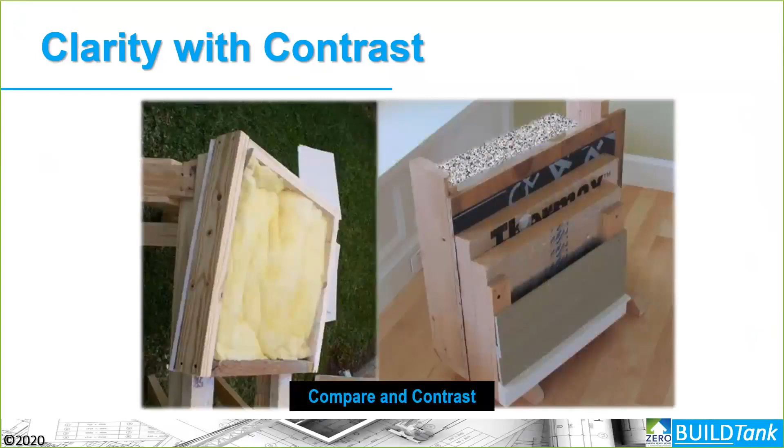You can use displays to offer clarity through contrast. So you can compare and contrast different types of assemblies, different window technologies or other things that you're using out there. We often call this eye candy that you might have around your house, demonstrating different components that you might have if you have the ability to have a sales model in your house there.

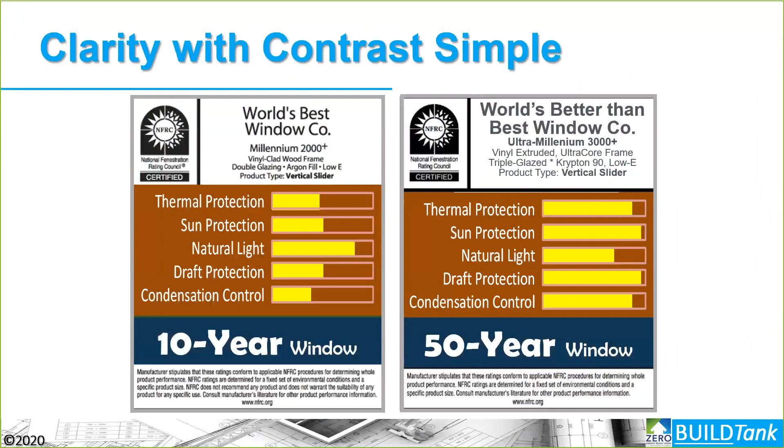What we do know is that 1 in 3 consumers have basically indicated that they don't trust the home building industry that much. So leveraging these labels, the independence of these labels is huge compared to just trying to get the consumer to trust you as a professional in the construction industry. It's unfortunate, but it's a reality out there. And so these labels are one way to help us demonstrate the value of what we bring to the process here.

Third-party verification, talking about that third-party verification can be an important part of that message, demonstrating the certificates that are done for each of the houses, blowing up a home energy rating certificate and this DOE Zero Energy Ready Home certificate, having them in your sales models or in your offices to demonstrate to your buyers what you're doing. They're great ways to start conversations, and that's ultimately what we're trying to do when we're selling houses, is to prolong the conversation and demonstrate our value in this process.

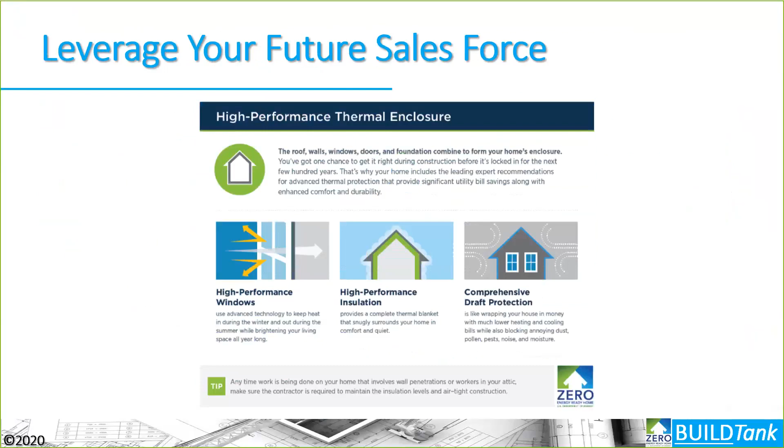You can also use this time to help your sales force understand what's going on and how you're going to communicate that message. There are tools out there that are just education material that people not intimately involved with the construction process could use to become better representatives of this program and of your ability to build this type of house. So leveraging this sales force becomes important, and we should take time to do that.

You can also leverage the voice of authority. They have drop-in messages you can put into your marketing material that say things like, according to the U.S. Department of Energy, Tim O'Brien Homes is part of a select group of top builders, for example. These are statements you can add to your messages if you so choose.

And make sure you're getting these documents out there. You can also apply for awards and take part in award ceremonies, then display these awards in your sales offices to demonstrate the power of what you're doing. A lot of builders use this to great advantage, but it's really what you put into it that you get out of it—you have to apply for the award.

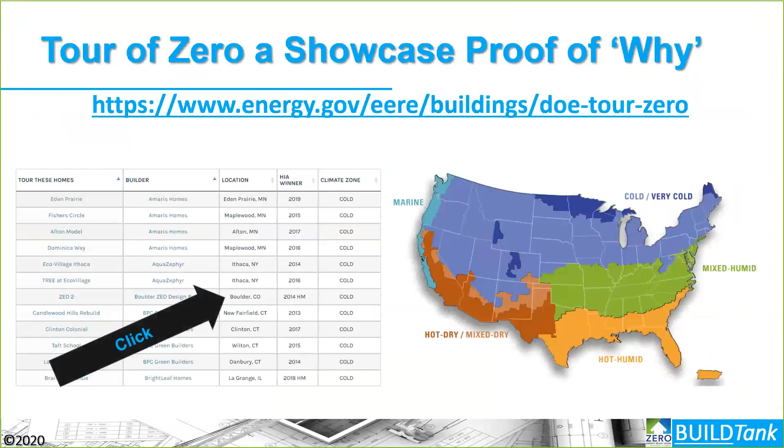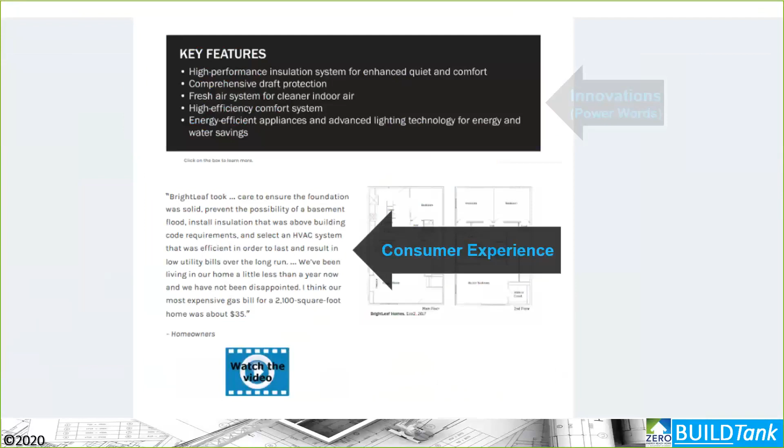You can add customer experiences to your web page demonstrating what you've done with this house. You can include pictures of the aesthetic beauty of the house as well as specific building features included in it. You can add things that talk about savings, contact information—in this case for BrightLeaf Homes—key innovations and features included in the house, consumer experiences, potential videos of the house, and floor plans. It's pretty inclusive, all the things you can add to that house listing.

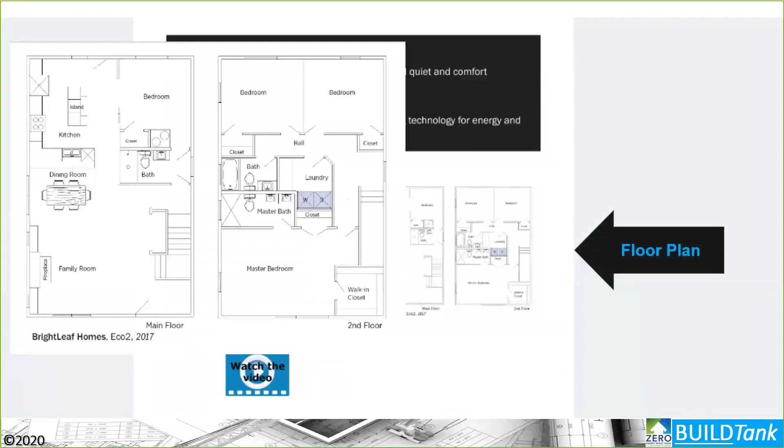Just remember, even though this is part of a code program in Summit County, that doesn't mean you can't market yourself as well and take advantage of that marketing benefit.

In conclusion, it's super important to take that next step and become a partner of the DOE Zero Energy Ready Home program. Start early in this integrated design process, bring all the players into your offices, and start having conversations about how you're actually going to execute this new way of building if you haven't done it before. Demonstrate project compliance by doing the energy modeling and ensuring your specifications meet the requirements of the program. We need to understand the seven mandatory requirements, specifically the program requirements in the Energy Star program, the Indoor Air Plus program, and the other requirements DOE puts on top of that.

I would strongly recommend branding yourself as a DOE Zero Energy Ready Home builder and taking advantage of that brand recognition out there. Ultimately, the best thing about this industry is that we continue to learn, and we figure out how to implement what we learn every day. It's a constant process of building something, evaluating what we've built, learning from it, and taking what we've learned to the next project. And we have that opportunity to do that right now.